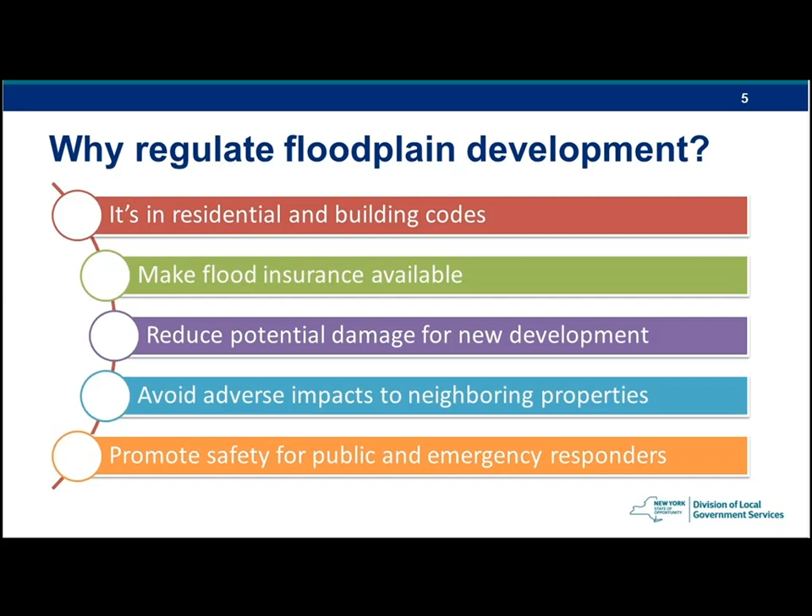We're going to expand on all these points on the screen—I'm not going to go through all of them right now—but we turn to local governments to be the regulators of development in their flood zones, because it is at the local level where the power is to regulate the use of land. So it's ultimately up to local governments.

They're on the front line of protecting their natural resources and planning for their futures. So we work together, the state and the National Flood Insurance Program, as Brad will tell us in greater detail in subsequent slides.

But it comes down to the local level. Ultimately, the state has a role, as we'll discuss, but it ultimately falls to local governments to regulate.

The floodway, just a few definitions here, is the most restricted area for development. None can proceed without an engineering analysis that can prove that proposed development will not increase the base flood elevation anywhere else in the floodway, or anywhere else.

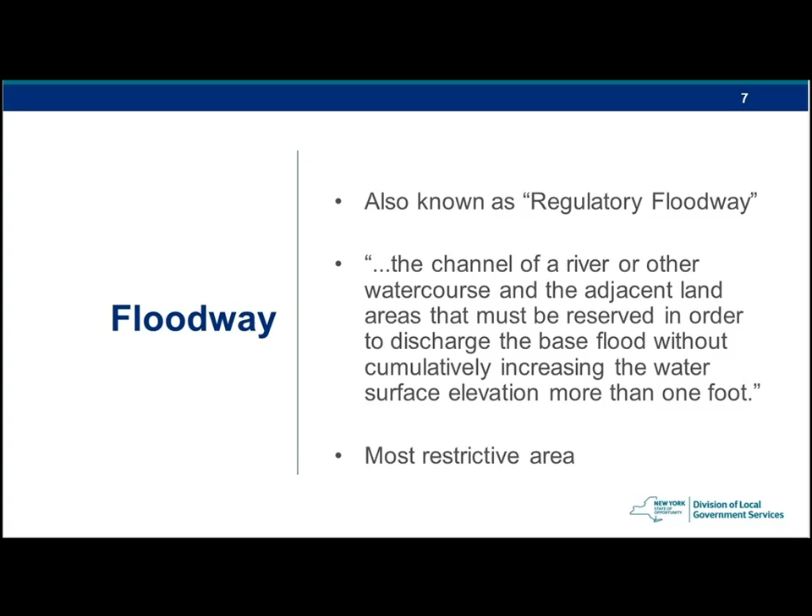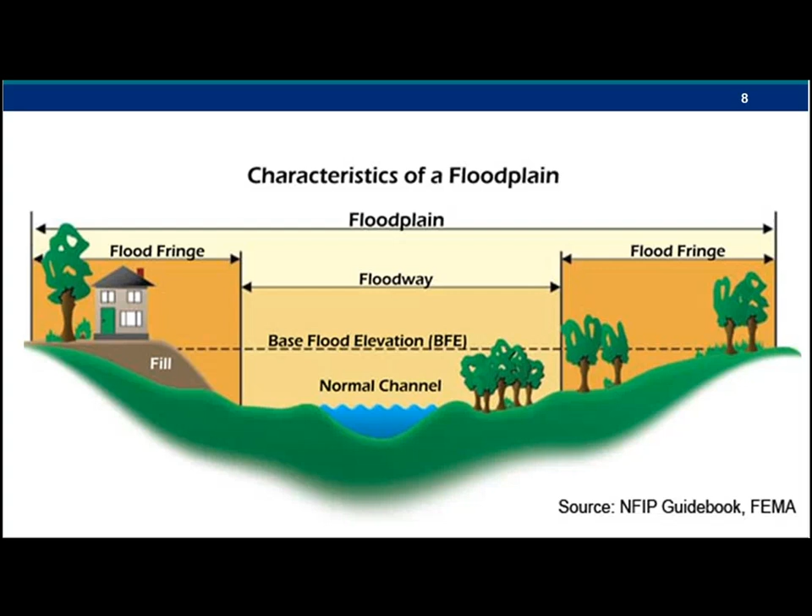So the floodway is the river or stream channel plus the immediately adjacent land needed to carry floodwater. The flood fringe area around that, the 100-year floodplain, has a 1% chance of flooding in a given year. The flood fringe can be developed as long as structures are elevated above the base flood elevation.

Just some acronyms here, and you can turn back to this slide later.

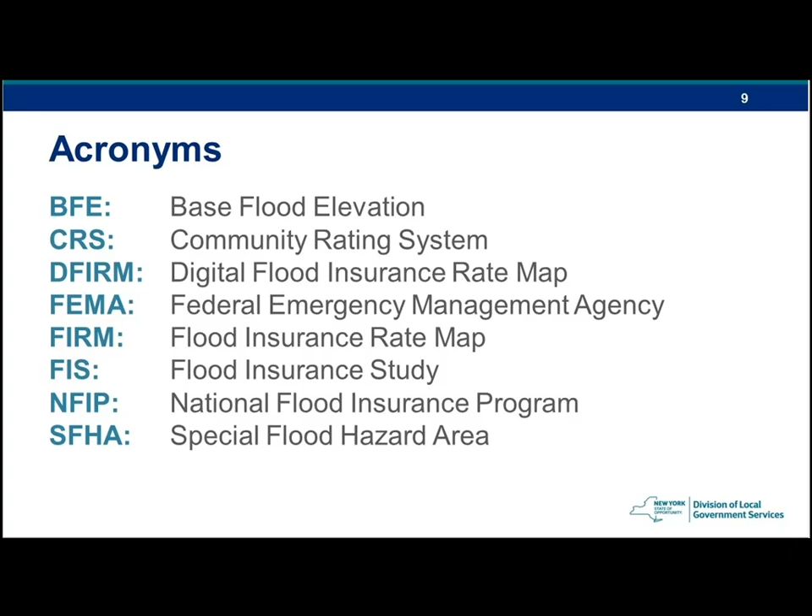So everybody can refer to, and even I use some of these acronyms here. So just before we move on, this is what some of the acronyms stand for. We'll refer back to them as we go through.

And then the flood zones themselves, which we probably won't say a whole lot about. I know I won't, but Brad might. Zone A is the highest risk of flooding, the 100-year flood zone, where a lot of the buildings in Zone A were there before the National Flood Insurance Program, which had rates and still does. The rates for those structures that preceded the National Flood Insurance Program are more subsidized.

Those settlements that existed before the program, before the FIRMs, the flood insurance rate maps, have a higher degree of subsidization. It's those structures that have come later that have a lower subsidy than the ones that preceded the program.

But homeowners and businesses with federally backed mortgages must purchase flood insurance if they're in Zone A. Zones V and VE are high-risk coastal areas that have the additional hazard from storm waves, and Zone D is where flood risk has not been determined, and B and X is between the 100 and 500-year flood zones, and C and X are places with minimal flood hazard that are above the 500-year flood level.

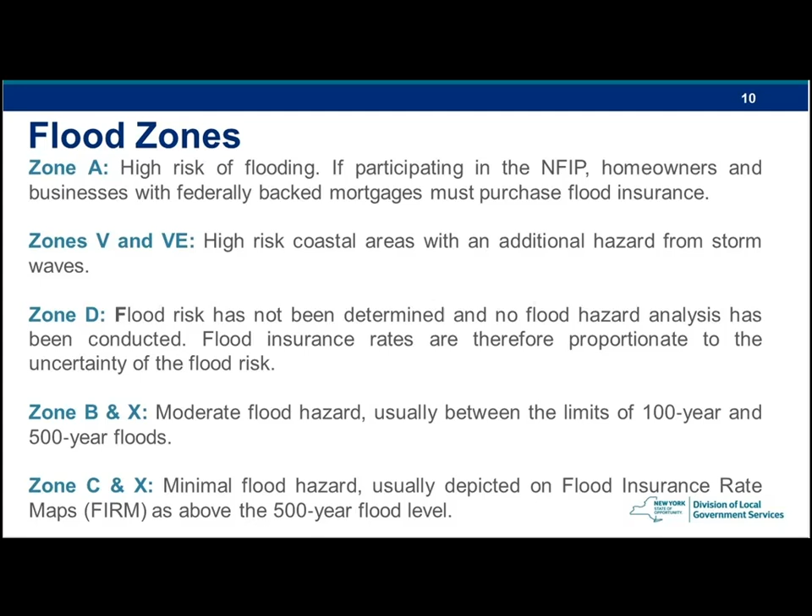So let's see if I can advance this slide.

So the special flood hazard area, again, is that 100-year floodplain. We do try to, and this has always been the message since I started in this program, and it continues to be: the 100-year floodplain terminology is a bit misleading.

The terminology can convey this sense that this happens once every 100 years. And I've actually heard people say, well, we had that flood last year, so we're good. We know that's not the case. We know there's a 1% annual chance every single year. So this year there's a 1% chance, next year there's a 1% chance, and so on. You could very well have 2 of those events in consecutive years, or even 2 of those events in 1 year.

So we do try, when communicating with the public, to convey that message, and I think the next slide or two actually conveys it a little bit better. But like I said, everybody calls it the 100-year floodplain. FEMA's trying to get away from that terminology, and most professionals in floodplain management try to as well, but it's probably just a lot easier to say 100-year floodplain than 1% annual chance floodplain. It's just the way it is.

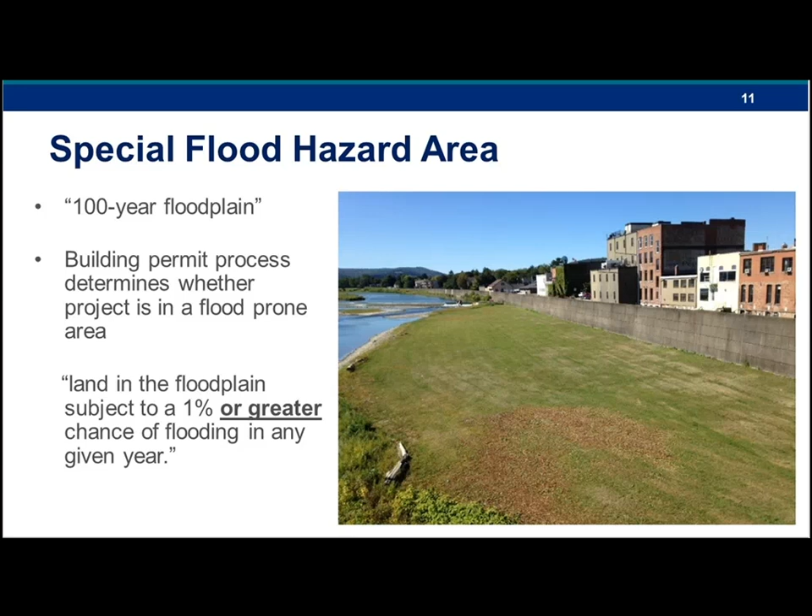Well said, Brad. Thank you.

A little bit better way to convey this information to the public: most people would take out a mortgage, maybe a 15-year mortgage, but 30-year tends to be a very common period that people choose to pay their mortgage back. And if we take that 1% annual chance and extend it out over 30 years, instead of 1 out of 100, we're looking at closer to a 1 out of 4 chance.

And so, again, when communicating with members of the public who do have mortgages, if you were to tell them that if you build in this zone, or move into a house within this zone, you're looking at a 1 in 4 chance of experiencing this 100-year flood.

And I think most people, even if I told you that you had a 1 out of 100 chance of winning the lottery, I don't know anyone who wouldn't buy that lottery ticket. If you then say, well, what if you have a 1 in 4 chance to win the lottery? Now there's definitely nobody not buying that ticket. Everyone's buying that ticket.

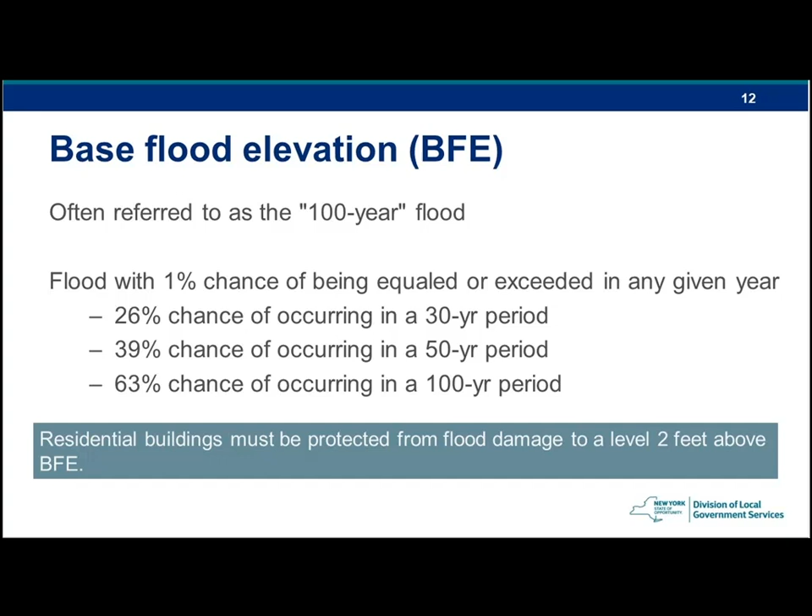And the 500-year level is used, or at least should be used by communities for locating critical facilities, things like hospitals or your emergency services, or places where you would expect people to be, either they can't evacuate themselves all that quickly, or it would be difficult to do so.

So you're going to have likely 4 corners. If the plot was perfectly flat, they'd all be the same, but very rarely, if ever, is that the case. So there's going to be one corner that's a little bit lower or a lot lower than the rest, or maybe one side is lower than the rest if it's a walkout.

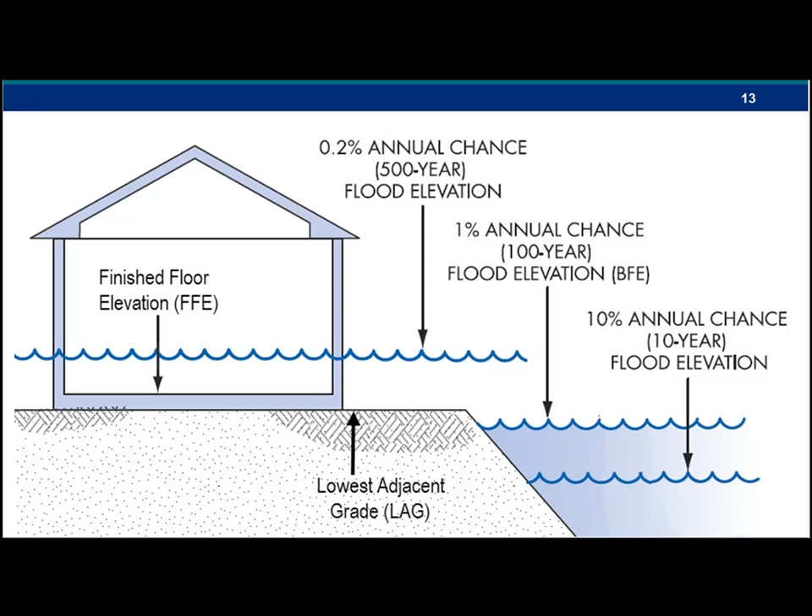If the lowest adjacent grade is at or above the base flood elevation, then we would consider that structure to be out of the floodplain, out of the flood hazard area, and therefore it wouldn't need to meet the regulations of the NFIP or the flood provisions of the Uniform Code. If the opposite is true, and that lowest adjacent grade is below the BFE, now it's in the floodplain and has to meet all those requirements, which we'll talk about a little bit more.

Now, to kind of step back as an overview of the National Flood Insurance Program, it is a federal program. It is administered by local communities. The federal government provides risk identification, so they publish the maps. They conduct the studies, or have the studies conducted by their partners, to identify the areas where we want to be regulating development to reduce flooding losses.

And those are the same maps that local communities use, they're the same maps that we use, they're the same maps that FEMA uses. There are other products out there that are more advisory, but when you're working in this program, if you're a floodplain administrator or if you're working with your floodplain administrator, you want to make sure that you are referencing the regulatory maps, because there's a lot of other products out there and even other interpretations of the regulatory products themselves.

And by that, I mean you might have a county mapper, and that mapper might have a flood hazard layer that you can turn on and off. But in those communities where we have still paper maps, still from the 80s, the process of taking those boundaries and digitizing them and putting them into that mapper, that's not a perfect process.

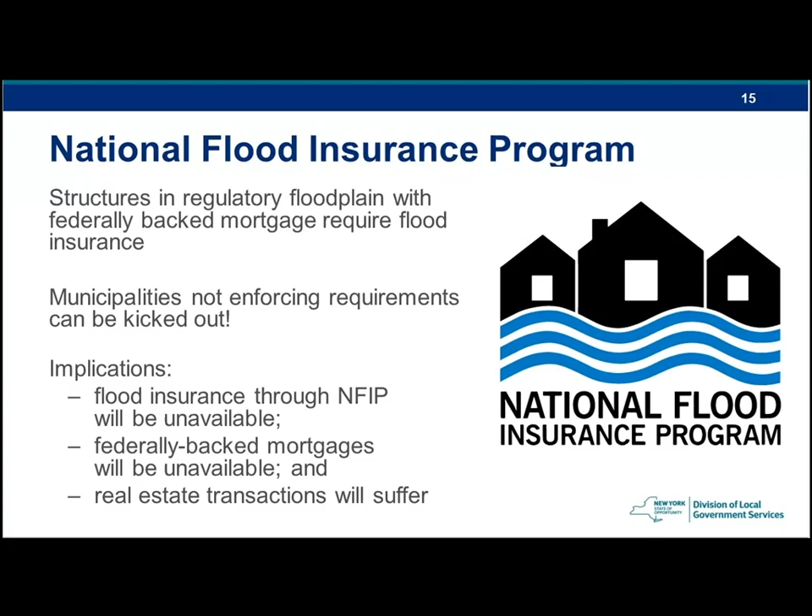So it's obviously not something that any of us want to see. Meanwhile, you'd have people at increased risk of incurring flood damages and no real way to protect against that loss. They'd be liable for the damages, and the amount of damage that a flood can cause could be prohibitively expensive very quickly.

So looking a little bit closer at the different types of foundations, the different types of development we have in flood hazard areas, we can see the base flood elevation.

We've got our grade, and in this example we have a structure that's elevated on fill, which is something you can permit. This is probably a FEMA drawing and it's a little more involved than the others. You would fill, and then the applicant would apply for what's called a letter of map revision based on fill. If they receive that, the map doesn't change, but they have this letter saying that now that you've brought in the fill, the elevation is above the base flood elevation.

So you're technically out of the flood hazard area at that point. You still want to keep your lowest floor, which includes basement, above the base flood elevation, and this may even in the future not be allowed. So we definitely recommend proceeding with caution when filling in a floodplain and then putting structures on top of that fill.

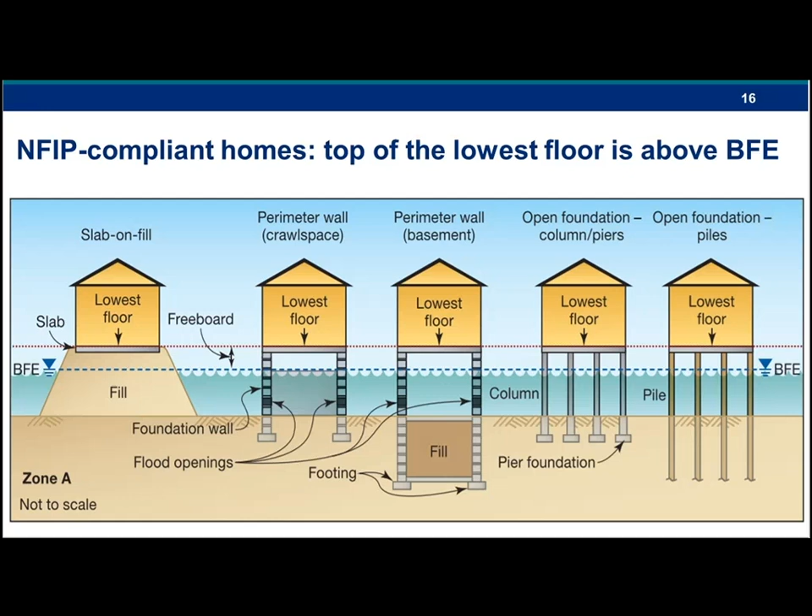Now the freeboard we've mentioned a couple times - it's that extra margin of safety. New York applies a 2-foot freeboard across the board for any development in the flood hazard area.

If you have older maps, you likely also have an older local law for flood damage prevention that may not include the freeboard requirements. When you get new maps, our office will reach out with a model local law that includes all the changes since that time. We keep a model local law up to date, and I'll send that as a template you can use to update your regulations, which would include the 2 feet of freeboard.

If that's not the case and you have the older regulation and older maps, the uniform code has still been updated since that time. So as long as you are enforcing the minimum requirements of the flood provisions in the uniform code, you should be in compliance with New York State standards and the NFIP standards, because the uniform code is actually above and beyond it for elevation requirements and a couple other areas as well.

As I mentioned before, this could lower your flood insurance rates. It's a less clear relationship now since risk rating 2.0 was moved forward, but it still makes sense to elevate higher where you can, where it's possible. All studies show that the benefit-cost ratio between the cost to elevate and the damages you won't incur is there to justify elevating a little bit higher where you can.

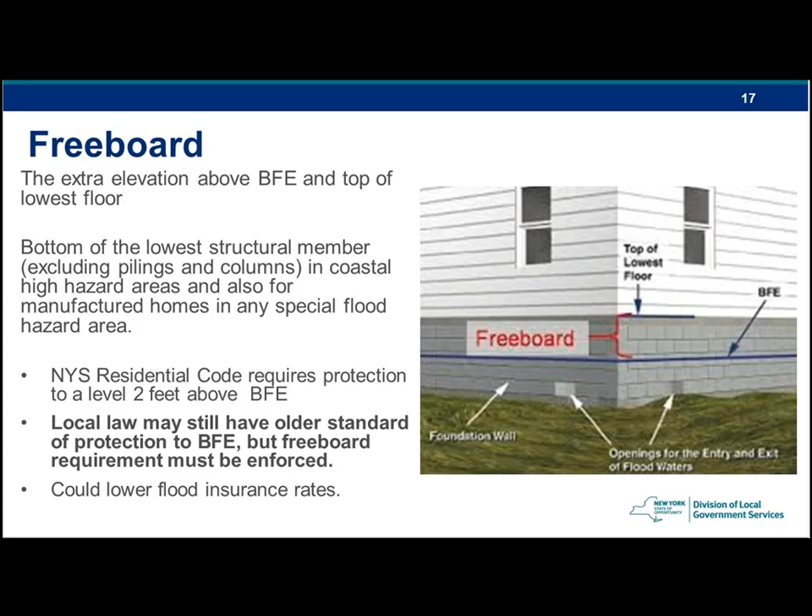Obviously we want to limit development in the floodplain. Keeping development out of these areas in the first place - it's not really even an argument whether that is a more effective strategy than allowing development in the flood hazard area, but you're taking on some level of risk if you allow development in those areas. It's acknowledged that it's an acceptable level of risk to take on, provided that development meets the minimum standards, but you're never going to minimize the risk as much as just avoiding these areas in the first place.

That's going to allow not only reduced risk to residents in the community, but also all the other beneficial functions you get from having natural floodplains. While the NFIP, National Flood Insurance Program, is really focused on keeping development safe, it's not as focused on the natural functions and benefits from floodplains. You're still going to receive all those benefits.

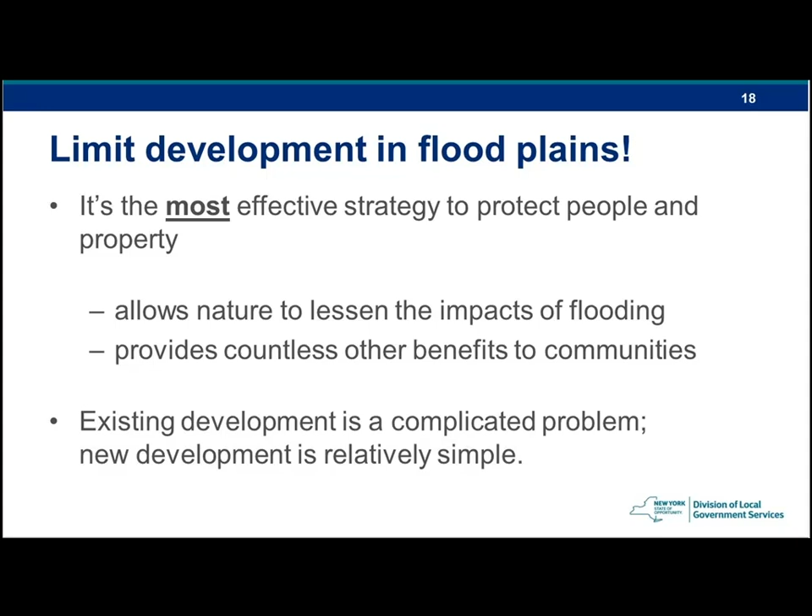So as I was saying, natural floodplains work like a sponge. They slow the flow of the water. Wetlands close to the headwaters of streams and rivers can slow down rainwater, runoff, and snow melt, especially if they're vegetated, because plants can slow the water down and absorb the energy. This helps prevent sudden, damaging floods downstream.

They also act as storage reservoirs. Floodplains are naturally storage reservoirs, and this allows excess water to spread out over large surfaces, reducing the flow. This is why it's important to preserve natural habitats like this, because it's nature's way of controlling floods. By draining floodplains and developing in them, there's less natural surface for the water to spread out, which increases water velocity and potential damage downstream.

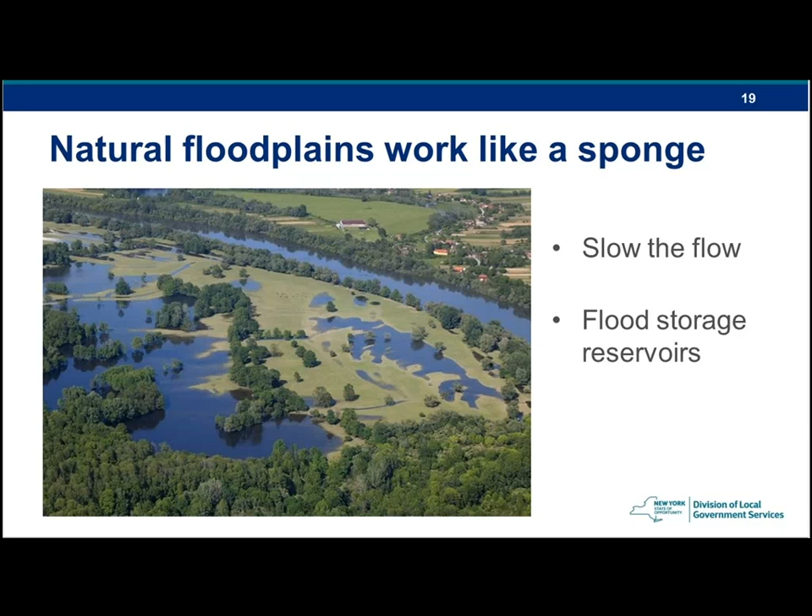But yeah, benefits of undeveloped floodplains — as we alluded to, it's going to reduce damage and allow plants and animals to have their natural habitat. These floodplains are lowland areas adjacent to lakes, waterways, wetlands, and rivers, typically covered by water during floods. The most visible function of a floodplain is its ability to carry and store these floodwaters.

So undeveloped floodplains also provide many other natural and economic resource benefits. Floodplains contain wetlands and other areas important to a diverse and healthy ecosystem, supporting recreational activities such as hunting, fishing, and recreational trails. So it's important to consider these undeveloped floodplain areas when making land use decisions within your community.

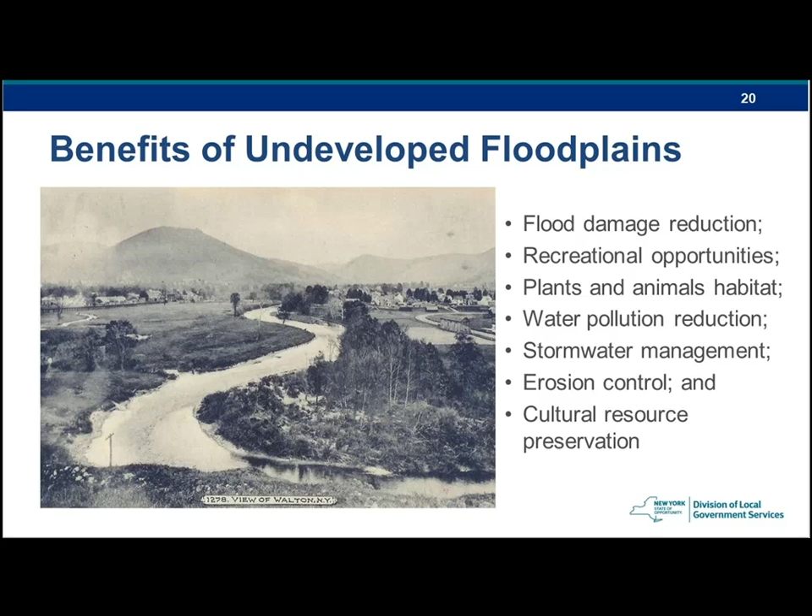Apologies if you hear my son screaming across the hall, but I think it's been mitigated at this point. I hope it's okay. I did just hear a tiny bit of it. That must be coming from your house. I hope it's not distracting you too much. Someone asked earlier — we had a dog last week, then a cat at the beginning of this presentation, and now a little boy. He's in the bath, so he's having fun at least. Good, the joys of working from home, right?

Anyway, as we move along, we have a model floodplain zoning law, which Brad and his cohorts at DEC are experts in.

They provide many model languages for local flood damage protection laws. This model language describes the minimum requirements for a community to participate in the NFIP, and communities can adopt more protective standards. DEC also provides additional language for communities that desire to do that. Also, New York State Uniform Fire Prevention and Building Code, referred to as Uniform Code, requires building design to include 2 feet of freeboard above the base flood elevation, which is actually higher than the national level, I believe Brad mentioned.

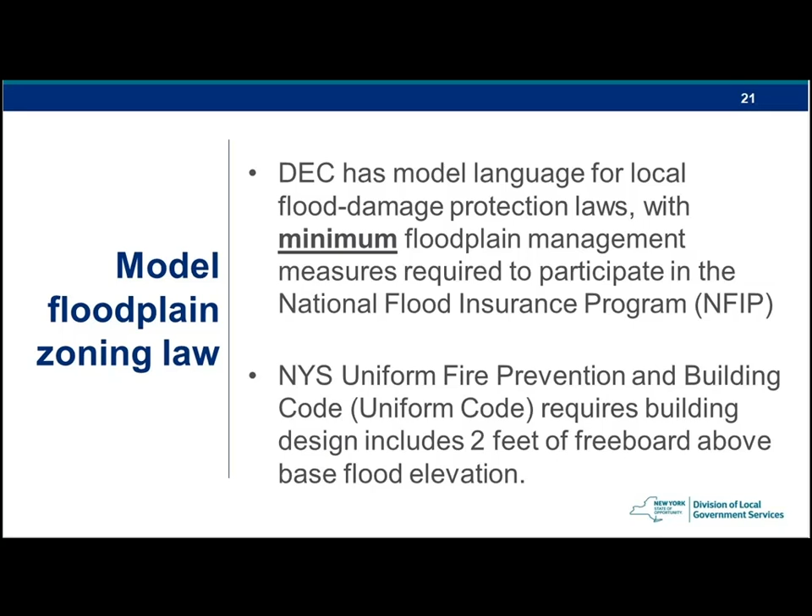So, no adverse impact principle. Some folks, if you've been on boards, may have heard this before, but it's a principle that aims to prevent the actions of any community or property owner from impeding on the rights of others, while also reducing flood loss. So anything built in a flood area shouldn't make it worse anywhere else, or should minimize those impacts. Drainage systems, stormwater plans, swales, et cetera, are examples of mitigation ideas. As a board member, you have a role in this, and you should consider the cumulative impacts of current and future development when reviewing projects.

Andy, you sound good, but can you speak up just a little bit? Sure, thanks, let me move my mic around here a little. Is this any better? Yeah, that's a little better. One of the attendees was saying your volume was fluctuating, and I noticed it too. Gotcha, thanks, okay, I'll hold this a little closer.

So, when reviewing projects as a board member, it's always a great idea to ensure that actions taken in the floodplains and throughout the watershed don't lead to adverse impacts on people's property and their rights as a property owner. These can change based on physical environments, social and economic conditions. But that pretty much sums up the no adverse impact principle. So we'll move along to the next one.

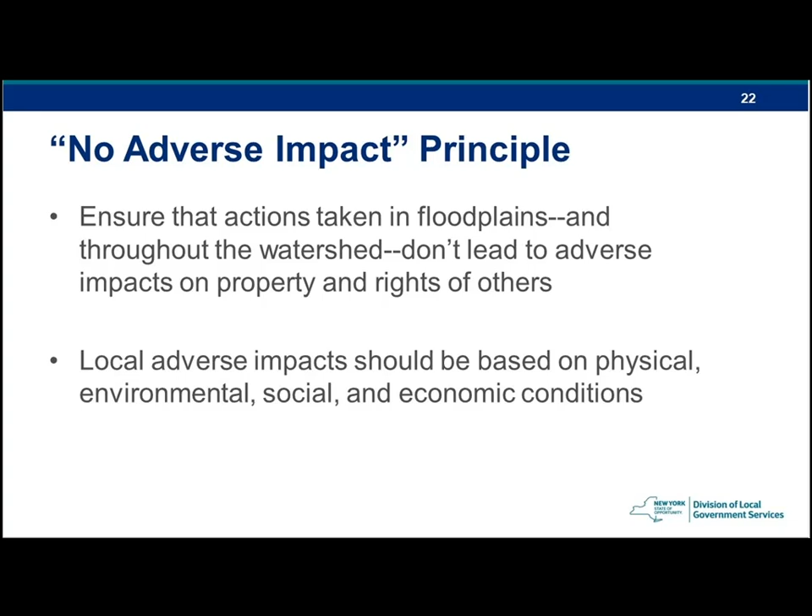Overlay zones. Basically, overlay zones superimpose an additional set of regulations over an existing zoning district, or multiple districts. Often these overlay zones fill a gap where traditional zoning may not have addressed it originally or specifically, or where there were complicated local conditions or multiple jurisdiction issues. For example, some communities refer to a floodplain overlay, which can put an overlay in place along a river, going over that river for an amount of feet determined by the regulations. That river might flow through several different zones and districts, but protecting land along the entire river with one set of rules applies across all those districts.

So you mentioned the multi-jurisdictional issues. That's one way to work around that. Some common standards you can see here in the slide include base layers, sets, permitted uses and dimensions. This can include restrictions, landscaping requirements, and standards for environmentally sensitive areas. There's different vegetation and plants that could be used to help mitigate some impacts, et cetera.

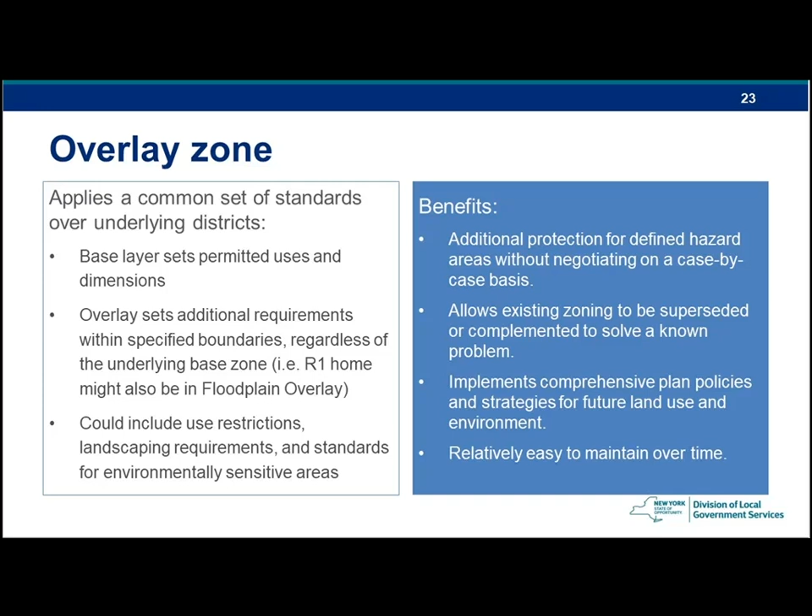Let's see, so I think we're going to go back to Chris, correct? Yes, thanks Andy. Chris, we did have a couple questions in that stretch. Could we quickly do those? Sure, okay, sounds good Brad. Brad, I think one or both of them will most likely be for you. Sure, that somehow doesn't surprise me.

Right, exactly. So the first question was, given the situation after Hurricane Helene in North Carolina and eastern Tennessee, do you foresee changes in New York law concerning flood mitigation? That's the first question, there's two different ones. So any thoughts on whether we're considering here in New York State any additions to our regulations, which are already more stringent than the national program, but anything being talked about that might be on the horizon? Yes, and it's not just New York State.

At our last national conference there was a lot of discussion about the regulatory level selected at the beginning of the program, which was kind of a compromise. I don't want to get too much into this larger topic, but basically the 100-year floodplain isn't the full picture. In any given area, you'll have areas where historic floods were more damaging than what we're actually regulating to.

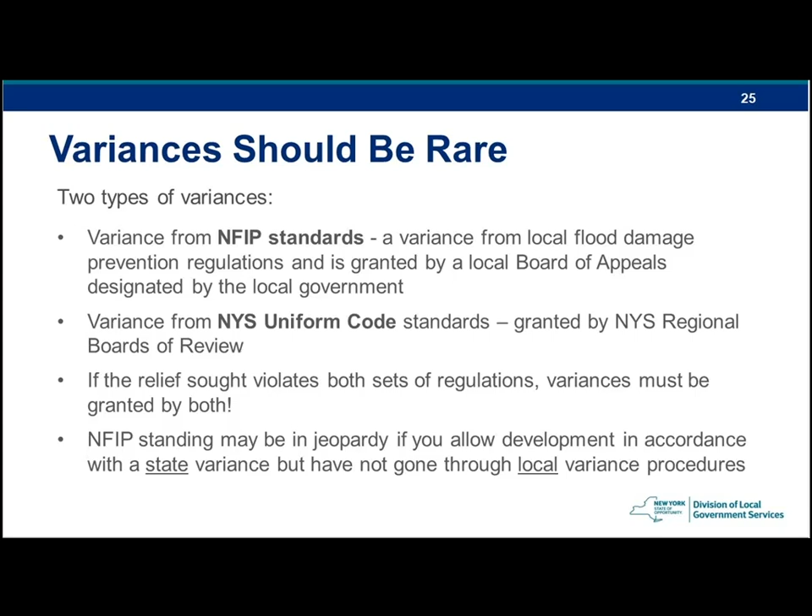So the criteria for granting some relief, per FEMA regulations, is showing cause that failure to receive the relief would result in exceptional hardship, that the relief if granted would not result in increased flood heights or increased flood potential for surrounding areas, causing problems for neighbors and others nearby, and—consistent with all our lessons about granting relief in the form of variances—that it's the minimum necessary to provide relief.

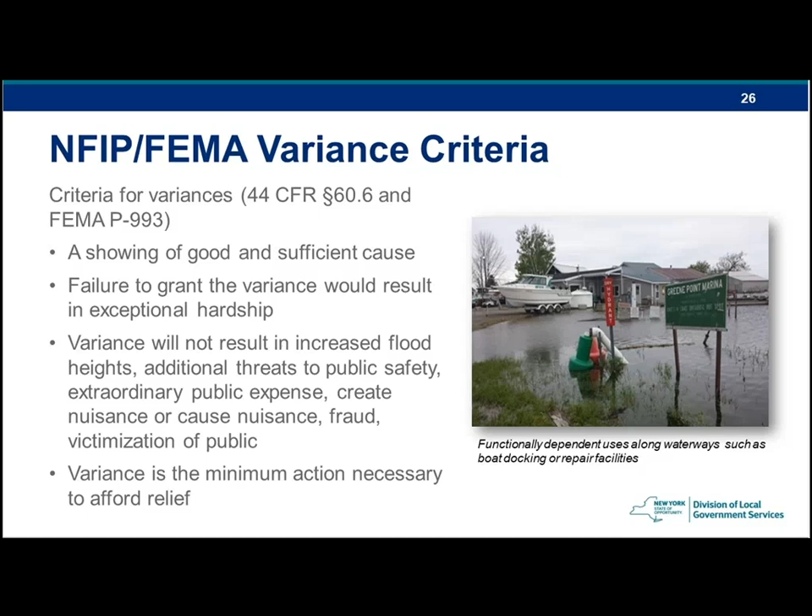And often we see examples—we'll direct your attention to the photo here—for water-related, water-dependent uses, which are those that receive variances most frequently and appropriately.

So, and this is very general for those who are unfamiliar with the process of variances from the Uniform Fire Prevention and Building Code, there is a means of granting relief from the code, and it's done by the codes division.

It's state law, so the state has regional boards of review that meet quarterly, and they provide relief when there are practical difficulties or hardship that would be relieved if there were some flexibility granted, and if the code actually creates an excessive or unreasonable burden that can be mitigated by this relief.

And it should not substantially affect provisions for health, safety, and welfare, and it would not result in an adverse impact to the code's intended objective. A variance can be granted if it does not inhibit the advancement of some other important public policy.

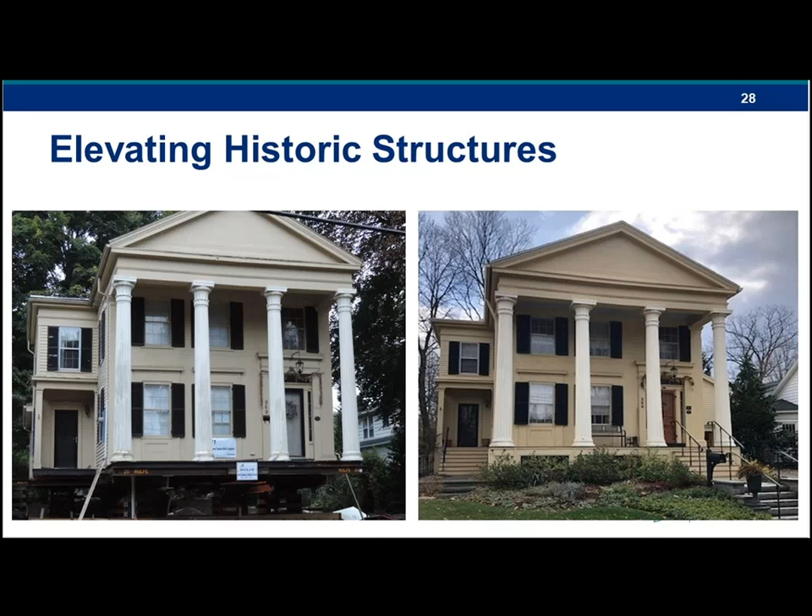And I'm just going to say here that if you have properties in National Register districts, or they're individually listed on the National Register of Historic Places, or they're parts of local landmarks or in local historic districts, the changes to make them more resilient and comply with the resiliency goals shouldn't destroy or alter the character that makes them contributing to these distinctions.

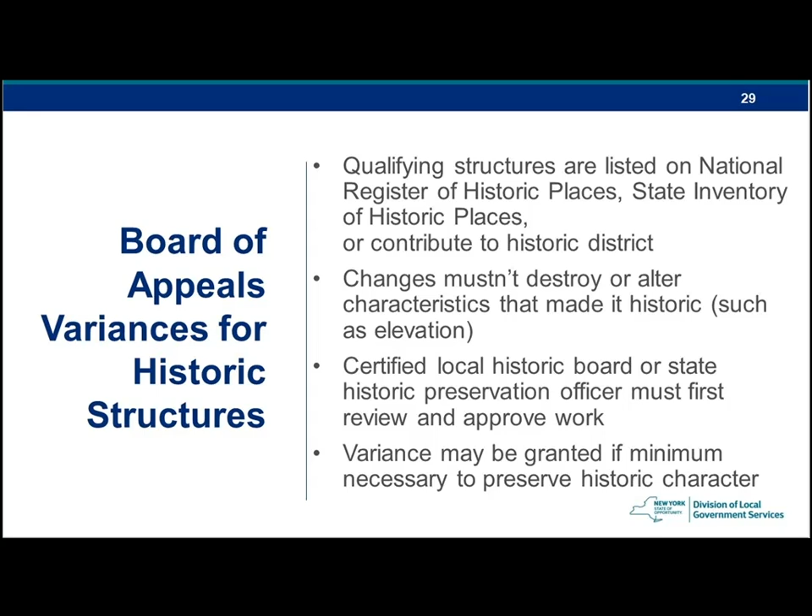So working with the State Historic Preservation Office, your rep at the State Historic Preservation Office, and if you have local historic district regulations, I think there's a general understanding by both bodies, both the state and local boards, that there is some degree of compromise in making our historic structures more resilient. We don't want them destroyed entirely, and so some compromise has to be accepted in preparing them, making them more resilient, preparing them for more intensive storms, certainly if they happen to be in harm's way.

So I am going to turn control of the screen back to Brad, who's going to talk to us a little bit about new development, which he touched upon a little earlier in flood zones.

I'm going to go through these slides a little bit quicker since this is a little bit of repeat information that I covered at the beginning here.

When we are looking at development, especially for the National Flood Insurance Program, there's a distinction between residential and non-residential buildings. For residential structures, we're looking at elevation, which is pretty much the only means to achieve compliance with the requirements. Elevation means determining what the base flood elevation is and then elevating the top of the lowest floor to that level plus 2 feet.

Basements are not allowed in the flood hazard area, and the definition in the Code of Federal Regulations, where National Flood Insurance Program regulations are found, is a little different than the definition from Uniform Code. A basement is simply a foundation that's below grade on all sides. So if you had a walkout basement and one full side is not below grade, that wouldn't meet that requirement and could be allowed.

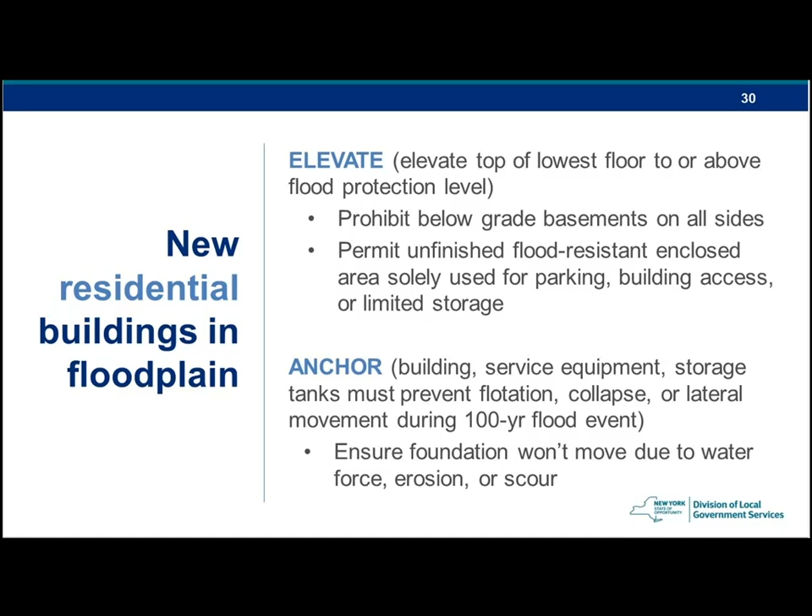For non-residential structures, all of the same requirements apply, except that non-residential structures can be allowed to dry flood-proof their way into compliance. The same elevation requirements apply. If you are going to dry flood-proof something, meaning you're going to protect it, you're going to seal the building envelope and not allow any water, or at least only a minimal amount of seepage into it - there are different rates that are allowed. It doesn't have to be completely impermeable, but the idea is you're keeping the water out.

With that comes the risk of hydrostatic pressure building up. The deeper the water is, the more pressure it's going to push against the walls, which could potentially compromise the integrity of the entire foundation. So all of that needs to be reviewed by a registered design professional, usually a licensed professional engineer, who signs off and stamps that the structure will still not collapse under those loads. In that way, they can dry flood-proof and protect the building without having to elevate out of the flood hazard area.

The idea here is, of course, that we don't have or shouldn't have people sleeping in non-residential structures - typically looking at a lower risk to life, safety, and human health. So that's part of the reason dry flood-proofing is allowed for non-residential versus residential structures.

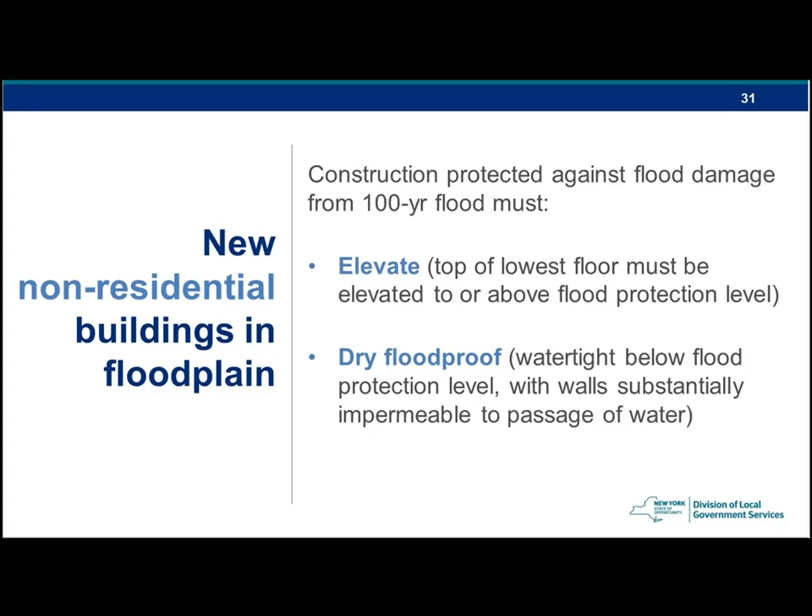Hazardous materials. We talked about the floodway being subject to higher velocities, making it a higher risk area with additional regulatory requirements, including prohibiting any hazardous materials or their manufacture from those areas. High hazard areas also include coastal high hazard areas, V zones or VE zones, where similarly we don't want to see hazardous materials. The regulations don't prohibit hazardous materials in the flood fringe, although we would highly recommend avoiding that wherever possible.

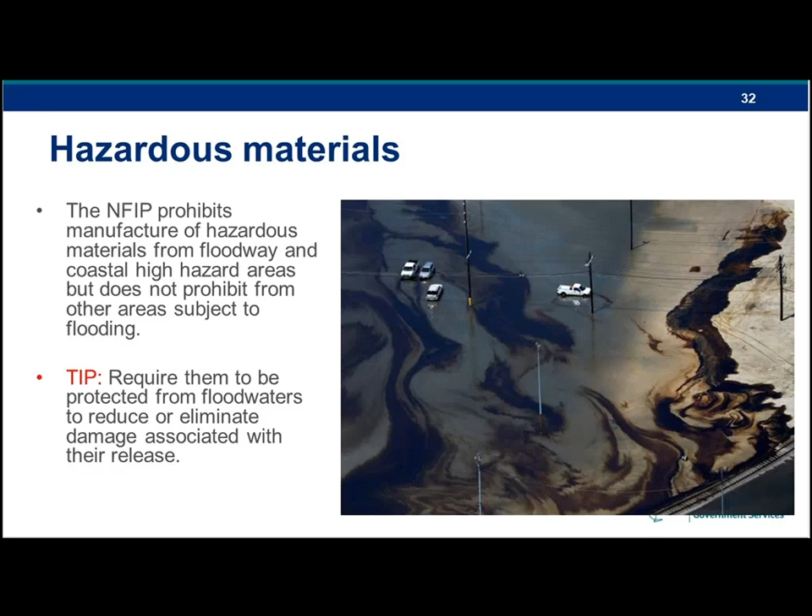Subdivision requirements. This used to involve more of a distinction before some recent code updates, because prior to the 2020 code, if you had development in a zone of approximate flood hazard without a base flood elevation available on the map, and you didn't have best available data from another source for that development, a single structure could be developed and elevated to 3 feet above the highest adjacent grade.

We talked about lowest adjacent grade, that's where the structure touches the ground at its lowest part. Highest adjacent grade is if you look at the site before it's developed, before it's leveled, the highest point of where that development footprint is going to be. It used to be that you could literally measure with a yardstick 3 feet above that for your elevation in areas without a published base flood elevation.

In subdivisions, for purposes of the National Flood Insurance Program, that's any subdivision of 50 units or over 5 acres. So over 50 units, over 5 acres would hit that threshold, and you'd have to have a base flood elevation developed. The applicant would have to hire an engineer to develop that base flood elevation to determine what the elevation should be.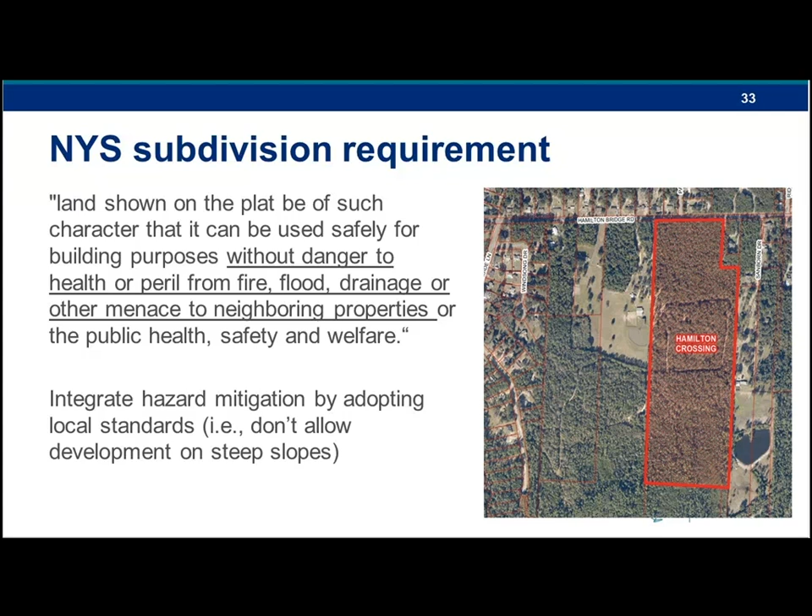That might include more green space, or strategically placing development so the structures themselves are located on higher ground. But if we're set on developing that area and there's no alternative, you just want to make sure everything is minimizing that risk of being flooded. So you're acknowledging that there's a flood-prone area, but moving forward and developing in a way that protects it.

Stepping back, the NFIP, the National Flood Insurance Program, does not prohibit development in the floodplain anywhere. It just requires that the community commit to enforcing regulations that protect and minimize damage in those areas. The same thought process applies for subdivisions, just with some additional considerations, and that might be something a floodplain administrator alone can't review, needing support from the planning board or zoning board.

And I think we talked about the base flood elevation data requirement here. We want to see adequate drainage, obviously.

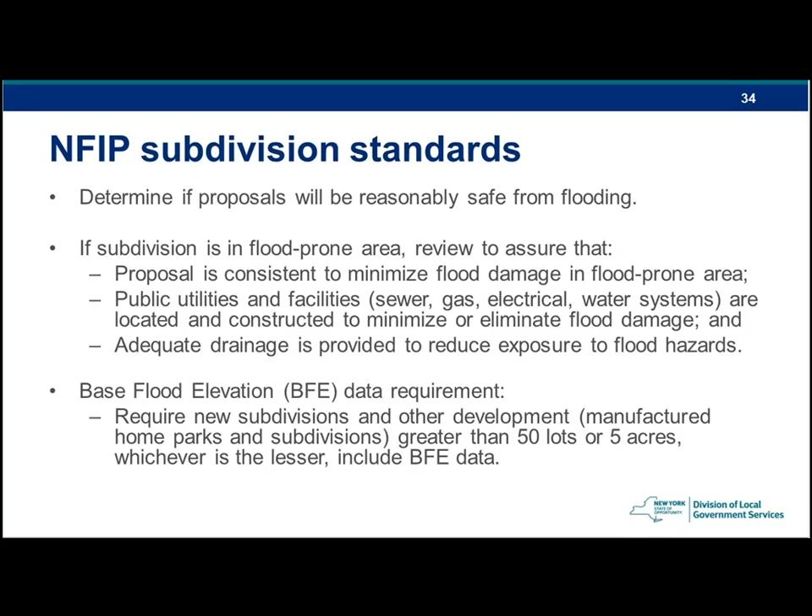So for subdivision tips, I'm just going to double check. I'm still on my slide. I've got that on there.

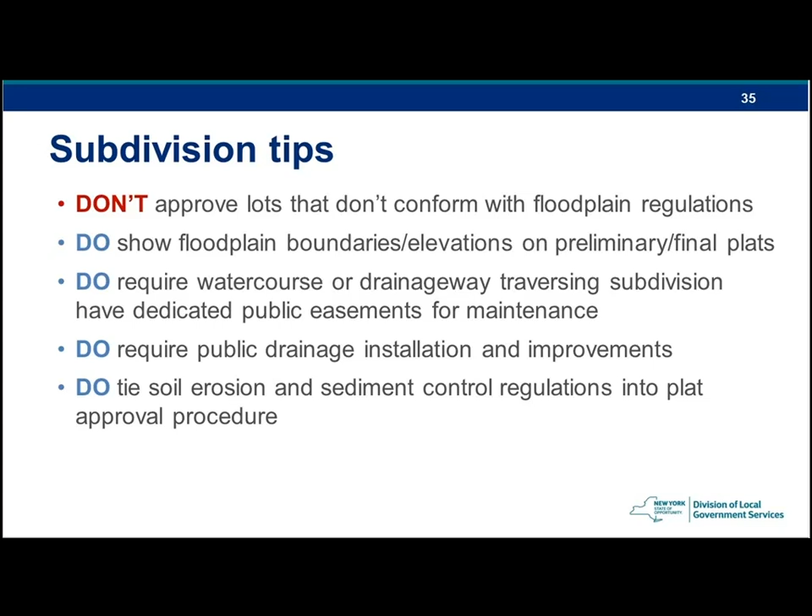So some helpful do's and don'ts for site plan review. When conducting site plan review through the lens of floodplain management, you're going to want to keep these things in consideration: preserve natural vegetative buffers, locate new streets outside 100-year floodplains, and ensure adequate stormwater and drainage facilities are there along with their maintenance.

General do's, it's not on the list here, but use a checklist, very important. It's a great tool for applicants so they know exactly what's required of them for the process, and it's great for their boards because it ensures they haven't overlooked anything. Board members, you want to weigh your applications, evaluate them for safety, flood risks, drainage, and other aspects in order to protect the public, the adjacent parcels, and infrastructure that may be nearby.

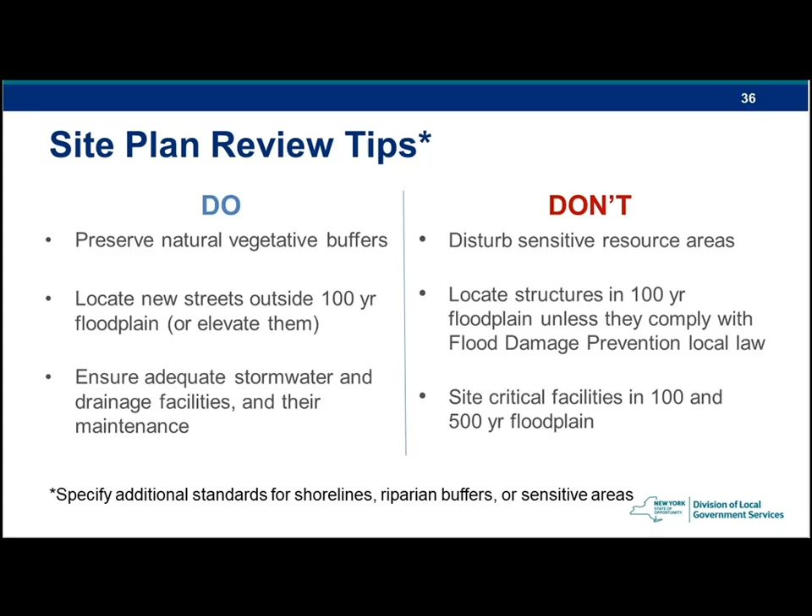Some don'ts: don't disturb sensitive resource areas, as we discussed before. The best way to preserve floodplains is by not building in it. Don't locate structures in the 100-year floodplain unless they comply with flood damage prevention local laws. And again, spell all these things out in your application as far as any additional standards - it goes a long way to help the process.

Wetland regulations in addition to state and federal permits - one of the best ways for local governments to enhance their wetland protection is by adopting local wetland ordinances. Local governments are often best suited to fill the wetland protection gaps that may be in their zoning because they're better situated to recognize the wetland values and needs of their community. So standalone regulations is one way to do that, or a component - you could wrap it into larger programs like a water quality protection program, shoreline management, stormwater protections, etc.

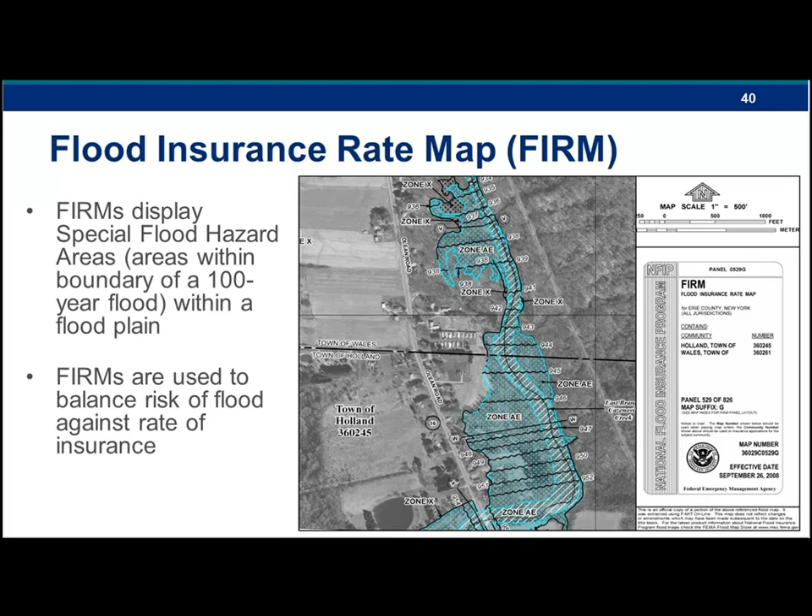Flood insurance rate maps should look something similar to this. You'll have the different zones, the different elevations, and depending on when they were issued, you're going to have a different presentation, but it's the same information. It's information about the zone, what zone it is, what elevation we would expect the water to reach in that zone, and it changes as you can see on this slide. As you're going downstream or upstream, the elevations are constantly changing. So when you're reviewing development, it's critical to determine what the base flood elevation is for that specific site, and it could change from house to house.

If you are a local floodplain administrator, if you're designated as having that responsibility in your local law for flood damage prevention, then this next section is for you. This is typically identified as the code enforcement officer or the building inspector. Could also be somebody from engineering, if you have engineering staff. Could be somebody on the planning board, zoning board. Could be the chief elected official, or the clerk. We highly recommend that it be somebody familiar with floodplain development, with some experience with uniform code, because a lot of the requirements for the program are contained within those codes.

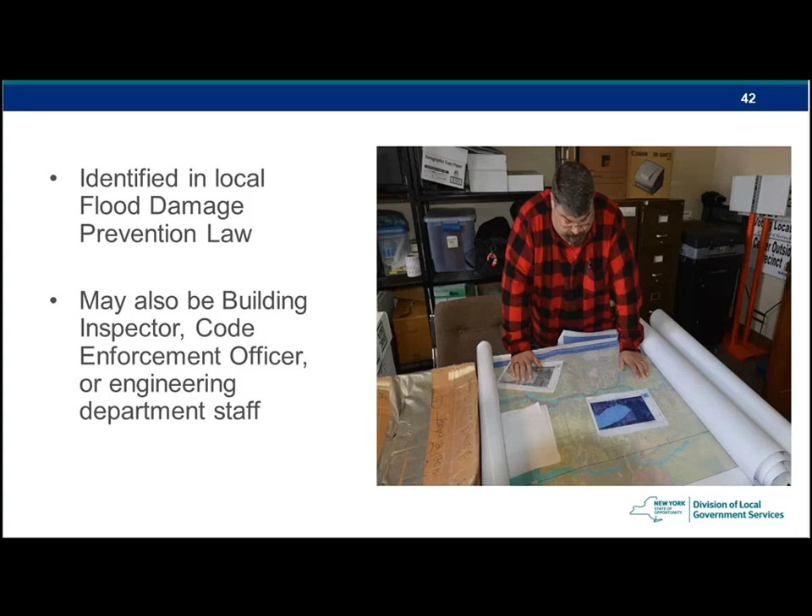Also, in the event of a disaster or a very significant flood event, if you've designated the chief elected official, you're presumably going to have a lot to deal with outside of just floodplain management issues. So in the post-disaster situation and realm, it's really beneficial to have somebody that can focus on floodplain development and the program, and not have other distractions that they're also responsible for.

So what are you responsible for in the first place? First things first is reviewing any development that takes place in the flood hazard area and determining as best you can whether or not it actually is in or out of the special flood hazard area. I say that because many residents will reach out to us and say their lender has identified that they're in a flood hazard area, and a lot of times they're not. We don't have insight into how lenders identify this, and it's also in their best interest to be a little conservative with their identifications.

They might be using a simple parcel layer, saying the property boundary is within the flood hazard area, so they send that letter saying you have to get flood insurance. But we know that if the building footprint itself isn't within that area, then that resident isn't at risk, at least for the program. They might still be at flood risk, but as far as applying the regulations, they might be naturally elevated outside of the flood hazard area. So the first step is knowing where your maps are, reviewing those maps, and determining whether you need to even move forward with evaluating the structure for flood damage prevention.

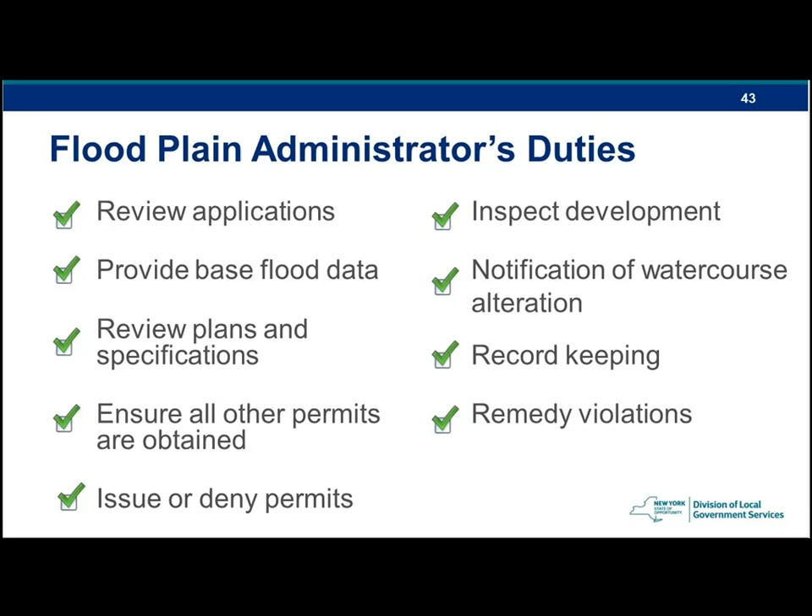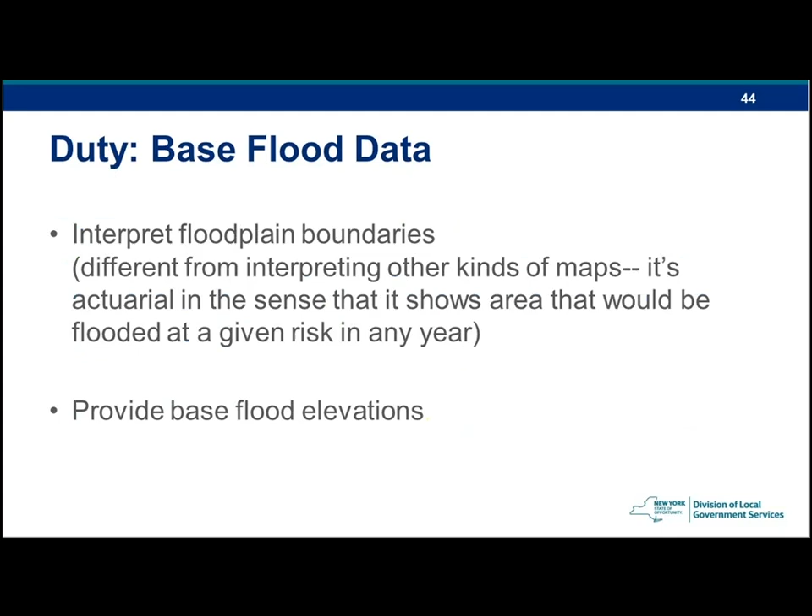Again, we've talked a lot about base flood elevations and how to interpret the maps. We have entire courses - we have a 2-hour course just on how to interpret these maps. So I don't expect people to just come away from this course knowing how to read a flood hazard map. Just know that at any time you can reach out to us and we can assist you with that, look at individual development, and help move forward from there.

We want to make sure that the site plans are including - I'm surprised how often the site plans don't include - the delineation of a flood hazard area. That should be something that if you're a floodplain administrator, you're putting that back onto the applicant as a responsibility of either themselves or whoever they've hired to put together the plans.

The flood maps are published at a county-wide level. You're never going to get the level of detail that you will from an engineer who's looking at a single site. They can use updated topography. They can delineate that boundary line a lot better because they're just looking at that one plot.

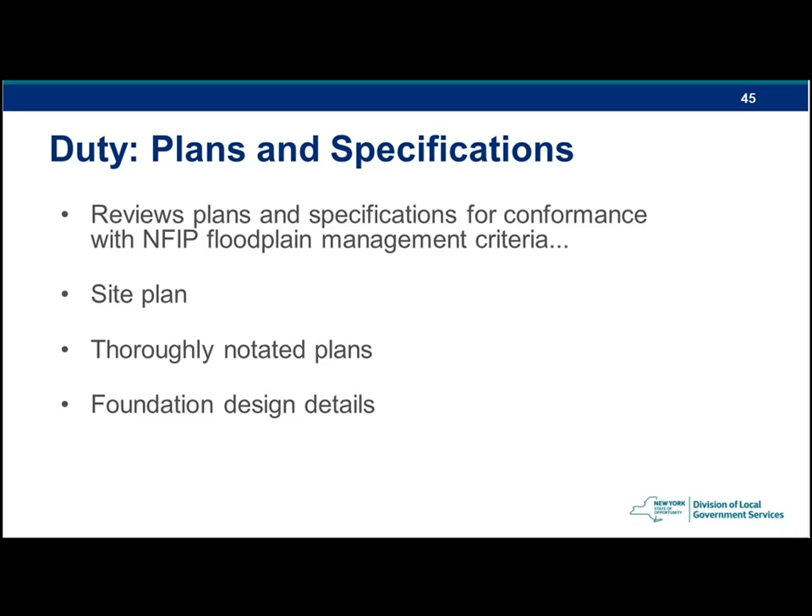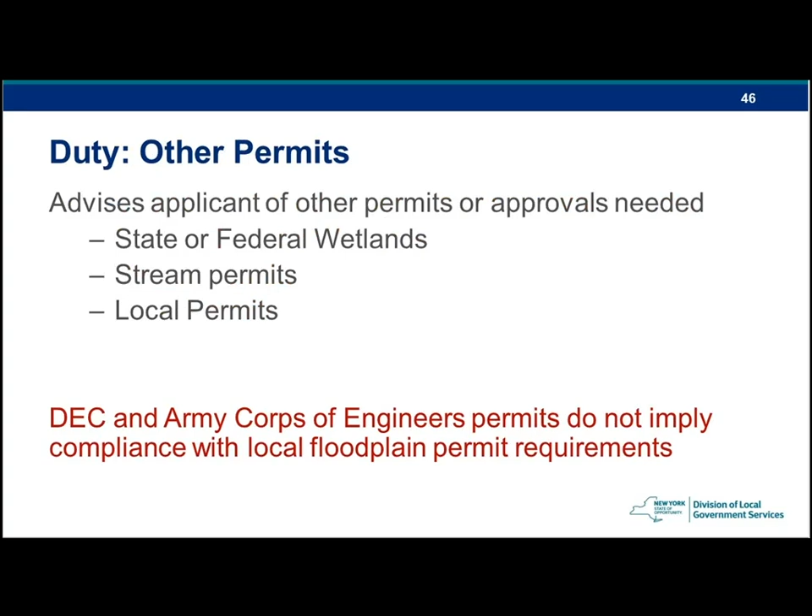We want to make sure all the other permits that might be needed are obtained before you issue your floodplain development permit. So if there's a state permit, maybe an Article 15 permit for some stream work that needs to be issued, you do not want to issue your local floodplain development permit before that permit is issued. And vice versa - we hear this happening where applicants will go to a floodplain administrator with a permit they received from DEC and say, I'm good, I have this permit that allows me to do this work. Those are separate permits, and that does not qualify as a floodplain development permit.

So your floodplain development permit is going to be issued for any man-made change in the floodplain, and that includes filling, grading, dredging - basically any alteration to unimproved or improved real estate is going to require some level of review to determine its impact on the floodplain.

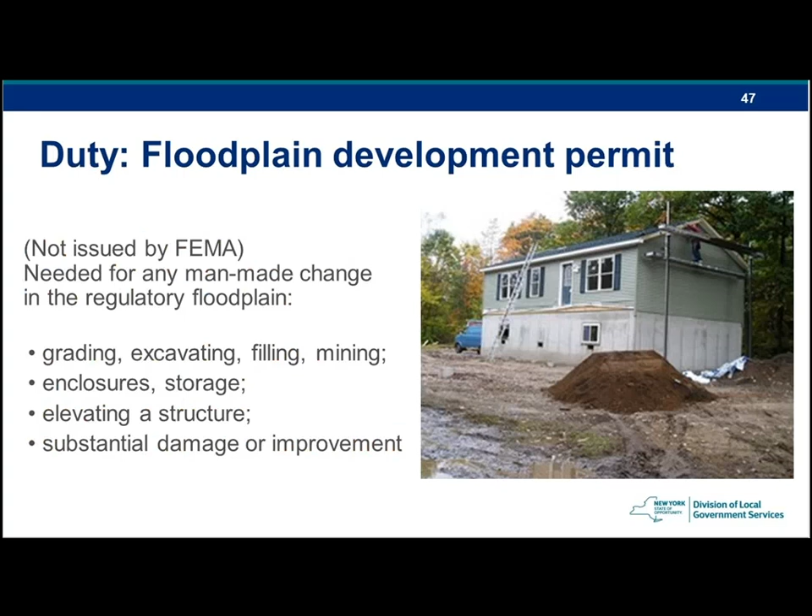And we'd already talked a lot about substantial damage, substantial improvement. Any watercourse alterations are going to require notification to not only your adjacent communities, but also FEMA and DEC. There's likely going to need to be a change in the map. There's going to need to be an assurance that the flood carrying capacity is maintained for that altered watercourse, and that the altered portion is maintained in perpetuity.

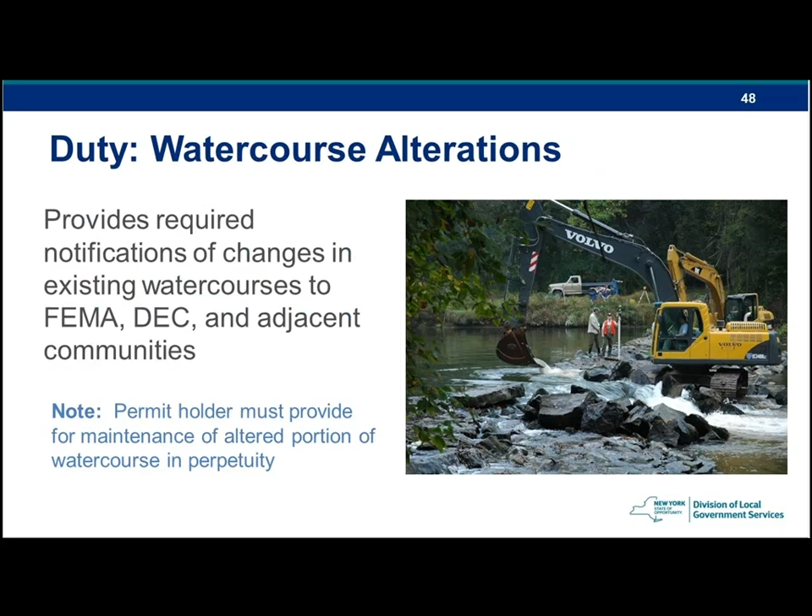Elevation certificate is something that we encourage all communities to use. It's a requirement for the community rating system, which rewards communities for going above and beyond, but this is something any community can use. It captures all the information you might need: lowest adjacent grade, highest adjacent grade, the finished floor level, the lowest horizontal structural supporting member, the base flood elevation, the vertical datum—all of that is contained in an elevation certificate in a nice, easy to interpret format.

What is not on your list, if you're a floodplain administrator, is determining zones for a lender. I haven't heard of this happening, but if a lender tries to pass off that responsibility, determining the zones is not your job. They can make their own determinations; they can do whatever they want, it's their money that they're lending out. It's our job as floodplain administrators to verify, using regulatory products, whether what they've said is actually true.

And we're not insurance agents. Maybe somebody on this call is, but I'm not, and most floodplain administrators I know are not. It's not our job to talk to people about their rate, though we can give general guidance like I have in this training—if you elevate higher, you're likely to have a lower insurance premium because you're lowering your risk. That's fair, you can relay that to anybody. But if they ask, I'm elevating up 1 foot, how many hundreds will my premium go down by—that's not our job.

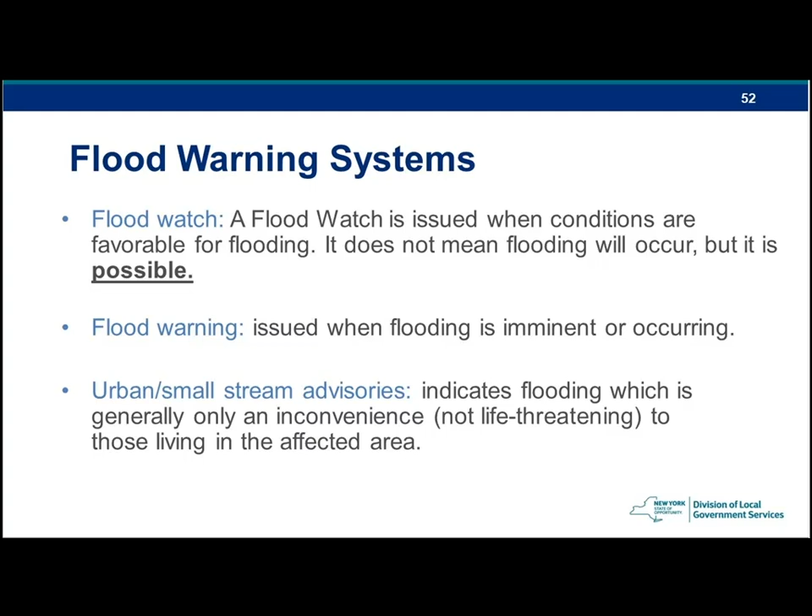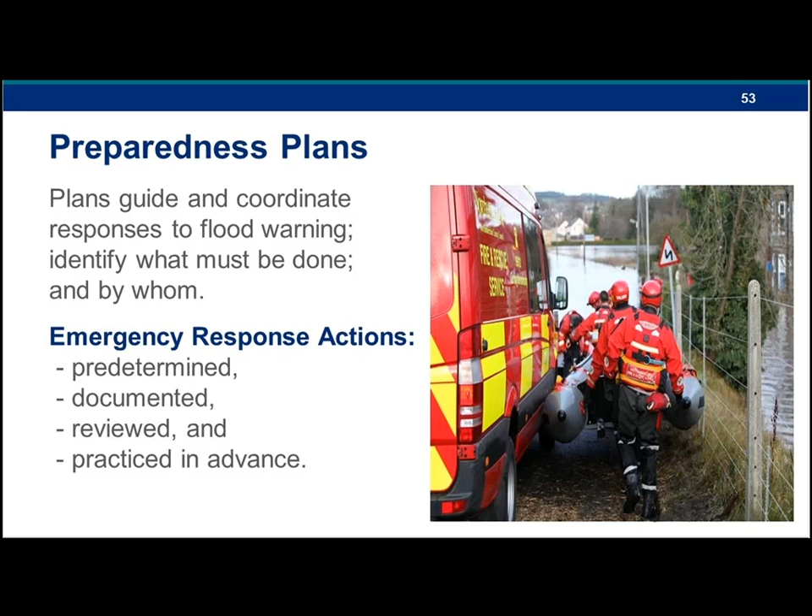But again, I'd caution that you at the local level probably have much more intimate knowledge of your flooding risks than the National Weather Service. Maybe they're relaying data on flood stage from the stream gauge, but you should use that information as a tool to strengthen your own emergency management capabilities—including having your own preparedness plans and identifying who's doing what, at what time, in each stage: before the flood, during the flood, and after the flood.

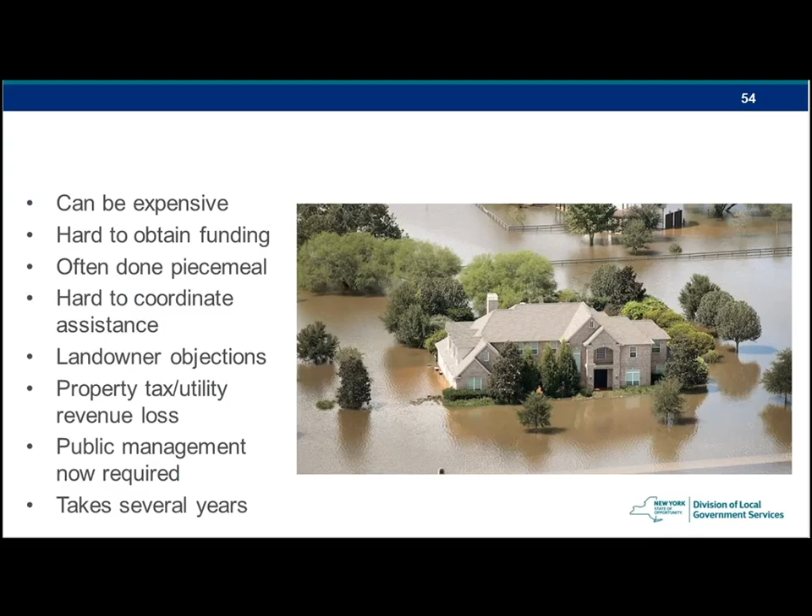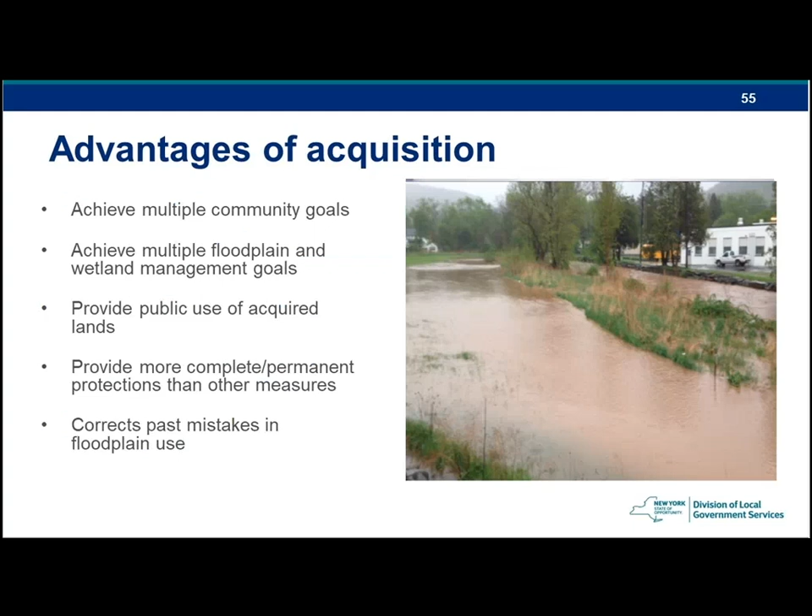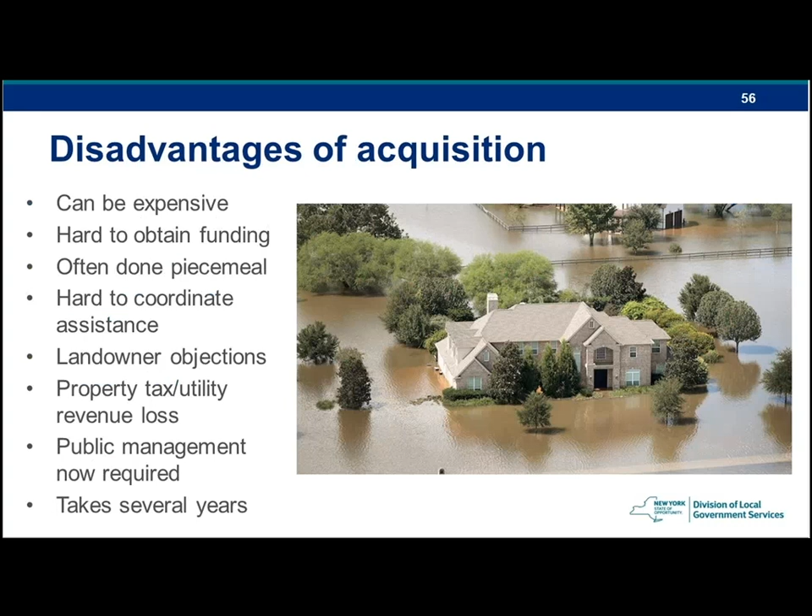The disadvantages, of course, are obvious. It's expensive and can be very controversial. There is, however, as Brad and his colleagues reminded us recently, money out there for acquisition right now.

So I think, Brad, if you could send us some of that information for local officials who are interested in accessing funds for acquisition, we'll send it out with the certificates. I think the conclusion, we've really been lucky to have Brad on, is to avoid floodplain development, and that the goal of the National Flood Insurance Program is a compromise. It was not to subsidize further development in the floodplain.

Rates are going up right now, gradually, and they attempt to reflect a discount to those properties that existed before the program, but it is becoming more and more expensive to develop in the floodplain. Rates are reflecting that, and Brad has great examples of laws that go above and beyond. I'm glad I asked that question of Brad earlier about real models.

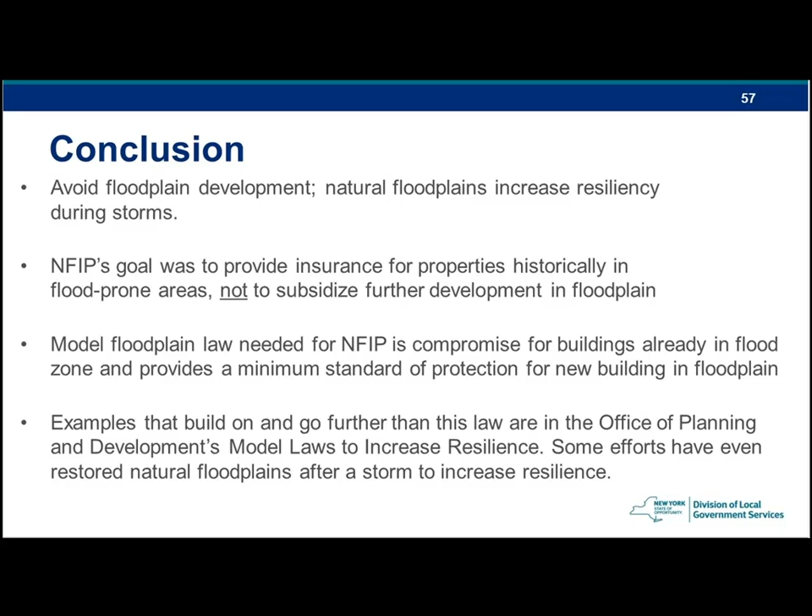So what do we have, Monica? Yes, so we have a few here. The first question is, my town is on the Hudson River. Does the Army Corps have input on anything above the mean high water mark? Once you get above that mean high water mark, is the Army Corps involved in any reviews in that scenario?

Anything above the mean high water mark? Yes, that's the question. Yeah. I don't have an answer to that. Oh, good, because I didn't either, and I thought I should. Sorry, I'm not sure, well, obviously, if it was a certain scenario, I think it would depend, but yeah, I wasn't sure either. Okay, well maybe we can take that one and research it and get back to the questioner.

I did answer this, but just in case people missed the written response, I think this is an interesting thing folks should be aware of. Are realtors and private sellers required by law to inform prospective buyers if they're in a flood hazard zone? Yes, they are now. Absolutely. I did respond to that, but I think it's important for people to know.